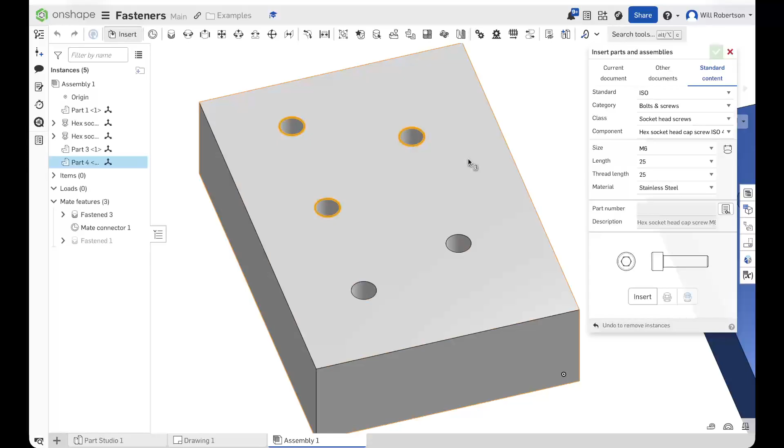There's a few different ways of doing this, and it's interesting to compare the differences. I already mentioned the idea that you can select your holes and insert your fasteners, so we go bam, like that. However, there is an easier way in this scenario where we can simply select the entire face, hit insert, and we get every hole at once.

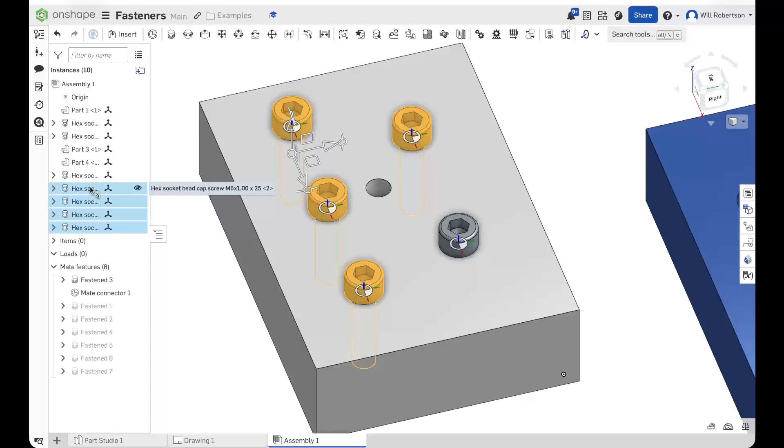But if we do it that way, and then we come back to our part studio and add another hole, come back to our assembly, you can see our hole appears, but there are no extra fasteners there. In some cases that might be appropriate - you want to put your 5 in and then your 6th one is something different. But there are other situations where you might just be changing the number of bolts in your pattern, and you do want the bolts to update automatically, or you don't want to have to manually change the number.

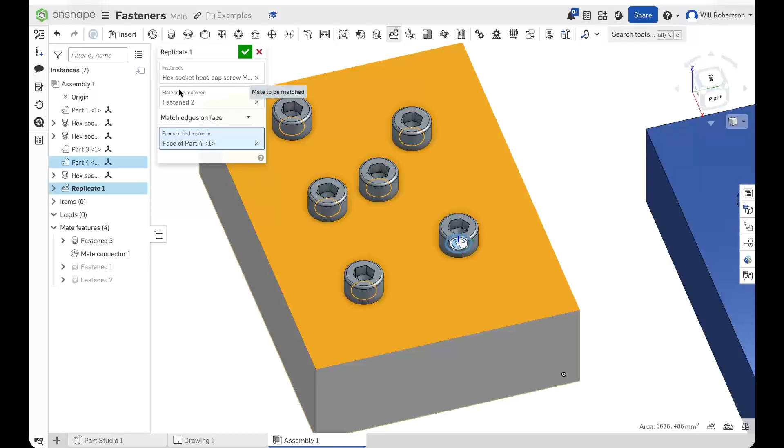So what I was pointed towards, and I hadn't seen this feature at all yet, is replicate. If we have a single bolt in our part, and we click on that bolt, and then we say find all of the other holes in this face, we see them all pop into view along those lines.

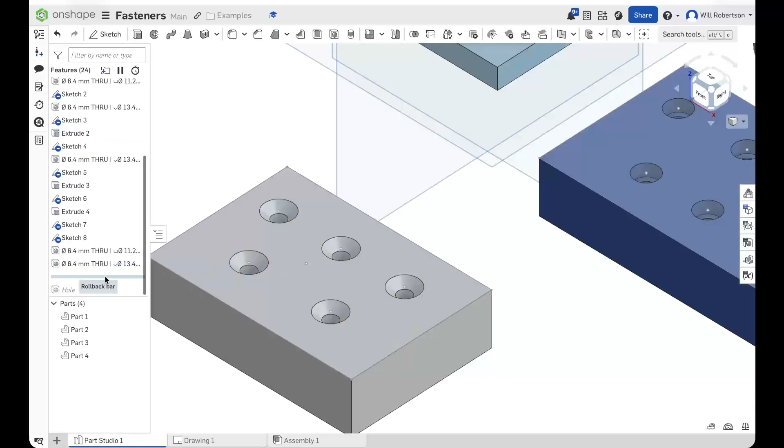And if we go back to our part, and let's say we remove that middle hole, come back to our assembly, we can see that 6th bolt has disappeared. And similarly, if we were to then put a hole back into that part, go back to our assembly, we can see the number of bolts here has updated automatically. So I think that's really neat.

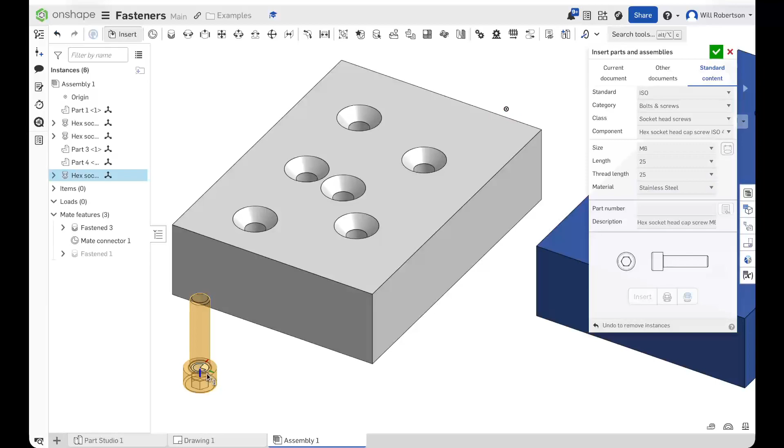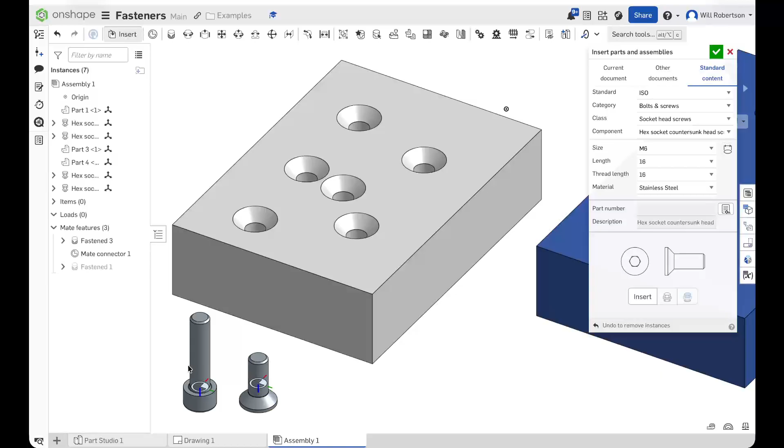This brings me to the countersunk situation. So let's flip ourselves around, and I have decided that it is really a bug with what is happening with Onshape and these countersunk bolts or screws, and it may be specific to this particular collection of them. Who knows, maybe the ANSI or the Imperial ones have got this sort of fixed up.

But the reason that makes me think this is a bug is if you look very closely here, and we compare these two parts side by side - I haven't tried very hard to line them up - but what you can see is that the mate connector on the socket head is on that connecting face. Now, of course, that has to be there so that when you click on the top surface, everything lines up.

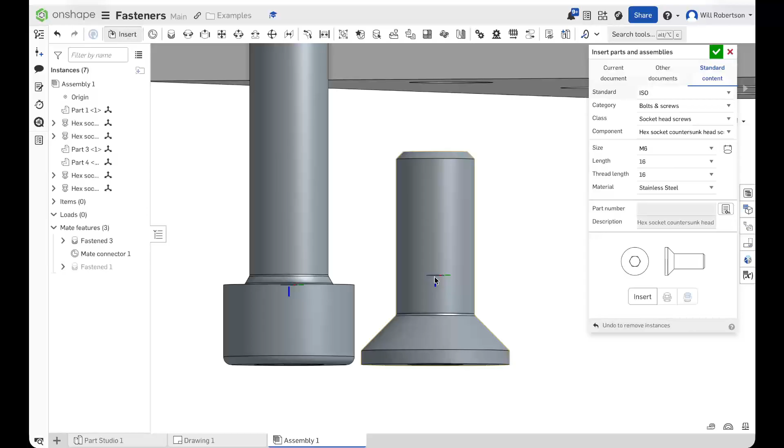But with the countersunk situation, you can see why this aligns incorrectly - the mate connector here is essentially in the center of that bolt or screw. Now if I put in a longer one, I think what this will show us is that yes, it's consistent, that level of offset. So using that mate connector to align parts is only going to work if you have a plate of exactly that thickness, which to me just doesn't really make sense.

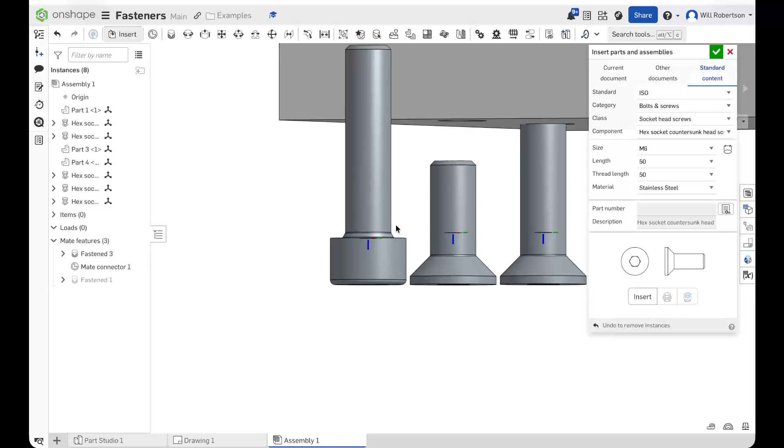So frankly, I think that to be useful, that mate connector needs to align with the end of that countersink, so that we can do the same sort of workflows we use for the standard bolt holes. However, having said all of that...

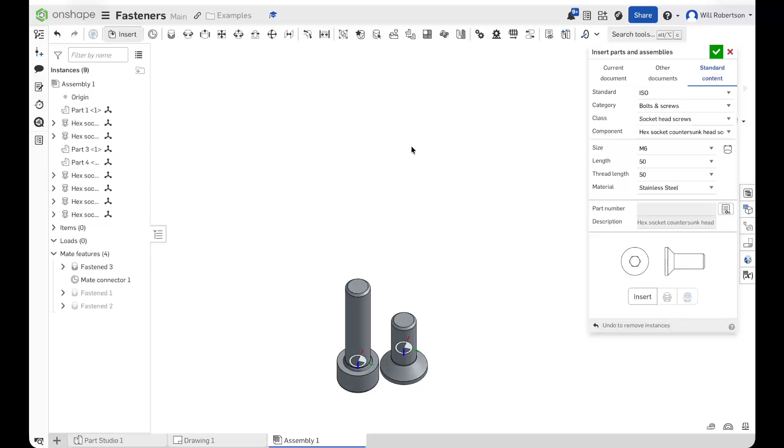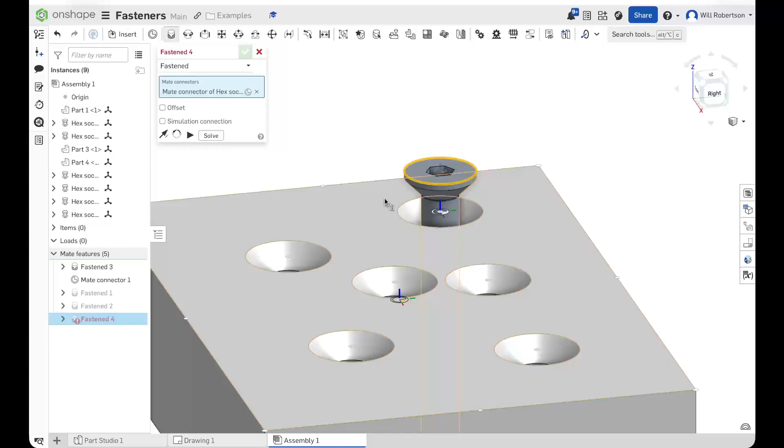If we come in here and we put our bolt in - oh, something just went wonky. All right, so we have it proud, such is life. We can then come into the fastener alignment, sorry, just the alignment tools, and we can align these to - that was not the right thing to do.

We want to align the top of the bolt to the top of the face here. So once we've done that once, that's what I would expect the tool to do by itself automatically, but it is really only one step.

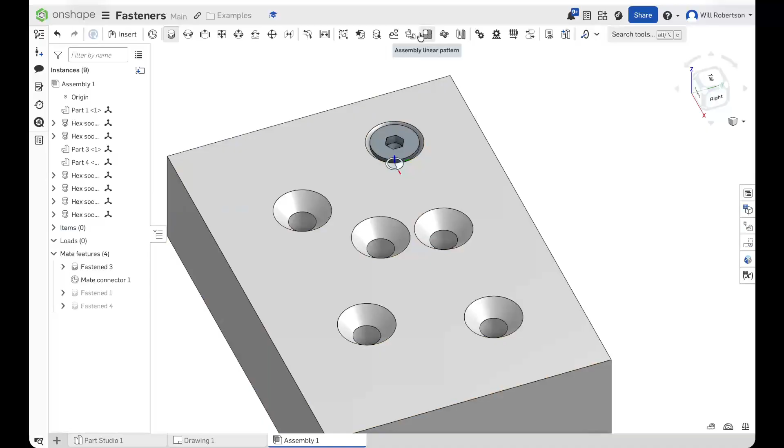And so once we've done that, we can of course then come along to our replicate tool, click on our bolt, click on our surface. Hang on a second. Something tells me that the way I've set up these constraints has messed up my example. So let me give that one more try. Replicate that bolt into that face, and it all works fine.

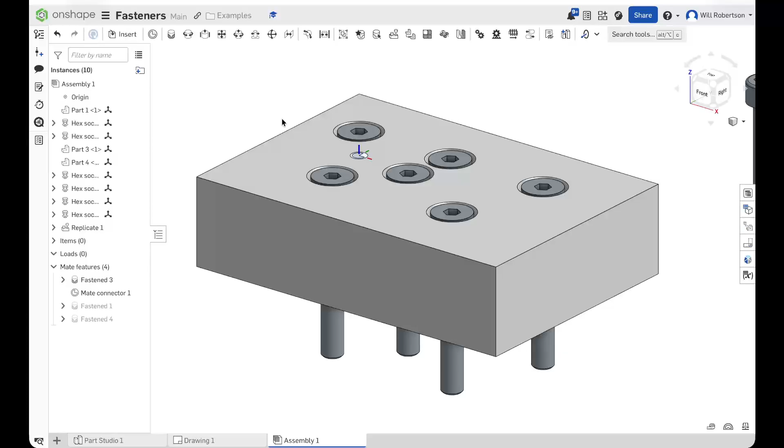So I think that mate connector positioning could or should be fixed up just to make it slightly more convenient to place these fasteners into these holes. But really, if you're doing it en masse, then using the replicate tool does make that a lot easier anyway. So it's really only a little thing, but yeah, that is something that tripped me up as I was going through some of the details in Onshape for the first time.